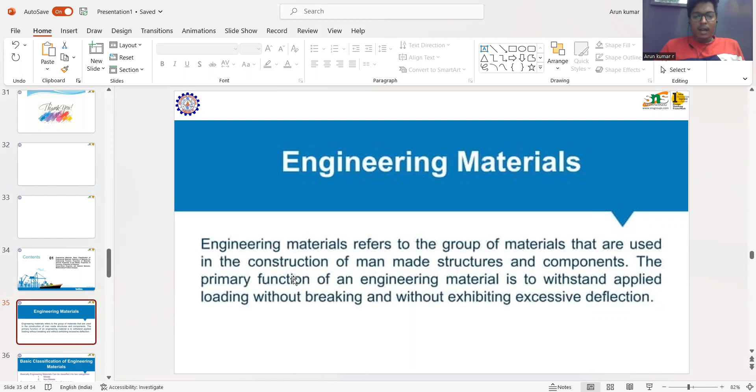So first of all, what is the meaning of engineering materials? Engineering materials refers to a group of materials that are used in the construction of man-made structures and components. The primary function of an engineering material is to withstand applied loading without breaking and without exhibiting excessive deflections.

So, what is the basic classification of engineering materials? Basically, engineering materials can be classified into two categories: one is metals, another one is non-metals. Engineering materials can also be classified as alloy, ceramic materials, and organic materials.

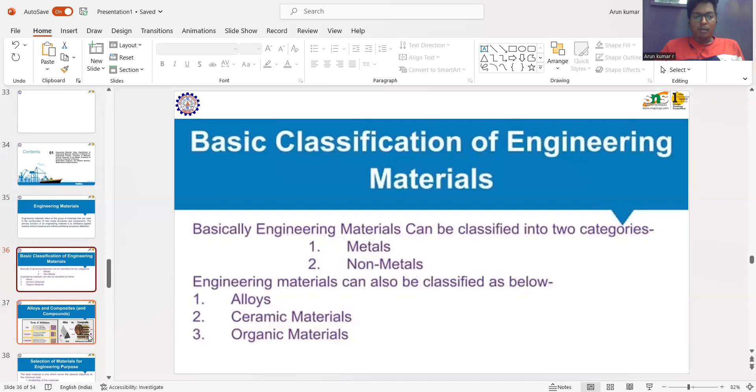So, what is the meaning of alloy, composite and compound? Alloy means: the combination of elements, at least one metal, in a solid solution with overall metallic property.

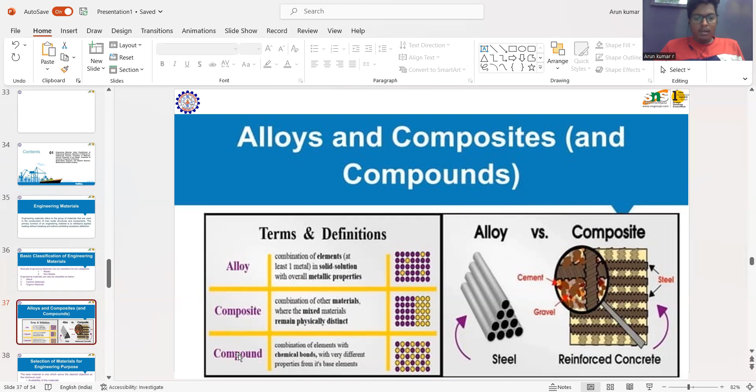What is the meaning of composite? Combination of materials where the mixed materials remain physically distinct. What is the meaning of compound? The combination of elements with chemical bonding, with very different properties from its base elements.

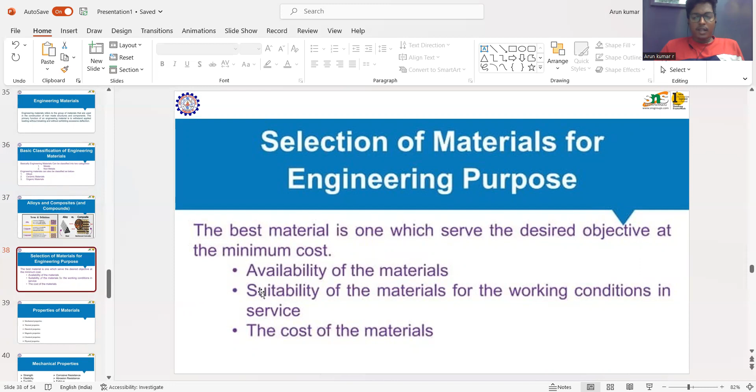Selection of material for engineering purpose. Best material is one which serves the desired objective at a minimum cost. Availability of the material and the suitability of the material for working conditions in service, and the cost of materials. So what are the properties of materials?

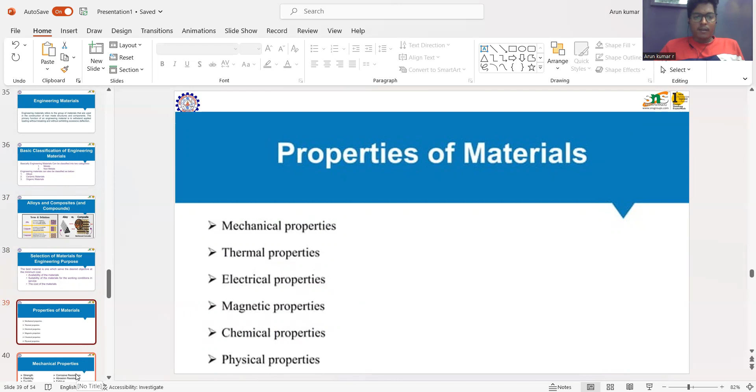The main important properties are mechanical property, thermal property, electrical property, magnetic property, chemical property and physical property. So we will discuss about them one by one.

So first of all, what is the meaning of mechanical property? This group or combination is called mechanical property. It's very important: strength, elasticity, ductility, malleability, plasticity, toughness, brittleness, corrosion resistance, abrasion resistance, fatigue, machinability, hardness.

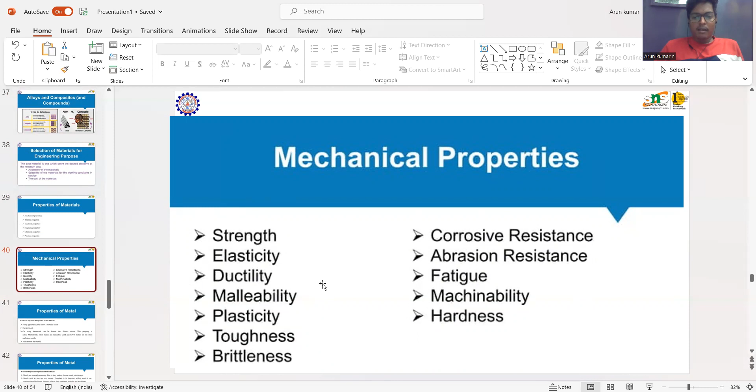So, properties of metals. General physical properties of metal: the first one is shiny appearance. They show a metallic luster, are hard to cut. On being hammered, they can be beaten into thinner sheets.

This property is called malleability. Most metals are malleable - gold and silver are among the most malleable metals. Most metals are also ductile, and are good conductors of electricity and heat.

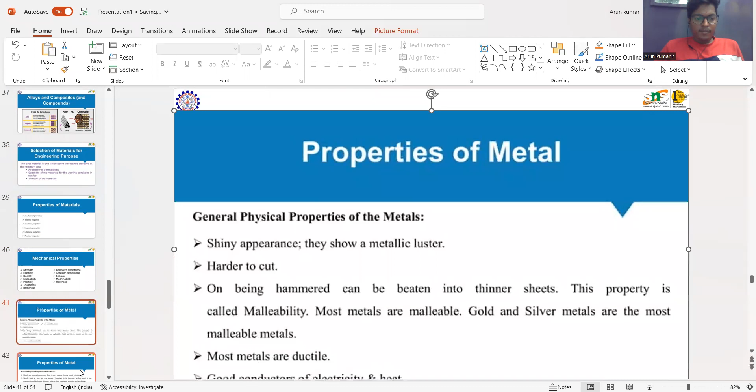General physical properties of the metal: metals are generally sonorous, that is they make a ringing sound when struck. Metals such as iron are very strong, therefore it is widely used in the construction of buildings, bridges, railway lines, carriages, vehicles and machineries.

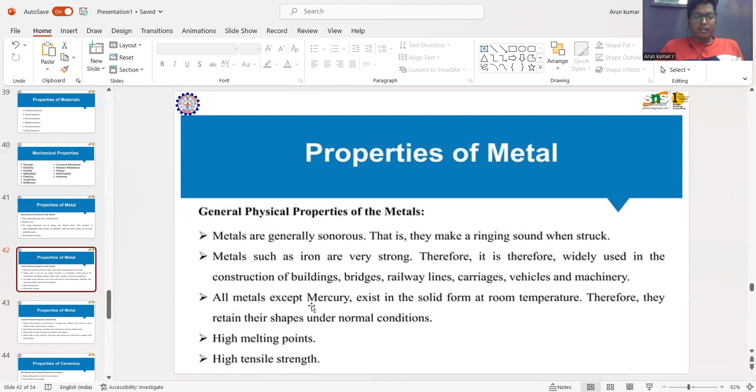All metals except mercury exist in solid form at room temperature. Therefore, they retain their shape under normal conditions. They have a high melting point and high tensile strength.

So, what are the general chemical properties of the metals? When burned in the presence of oxygen, metals combine with oxygen to form metallic oxides, which are basic in nature. Metal hydroxide changes red litmus to blue, which shows its basic characteristics.

Most metals corrode when they are exposed to the atmosphere. Metals differ in their reactivity with acids. Most metals react with acids to produce hydrogen.